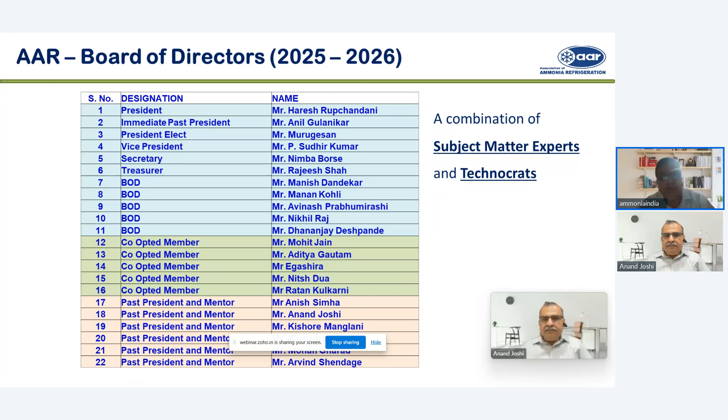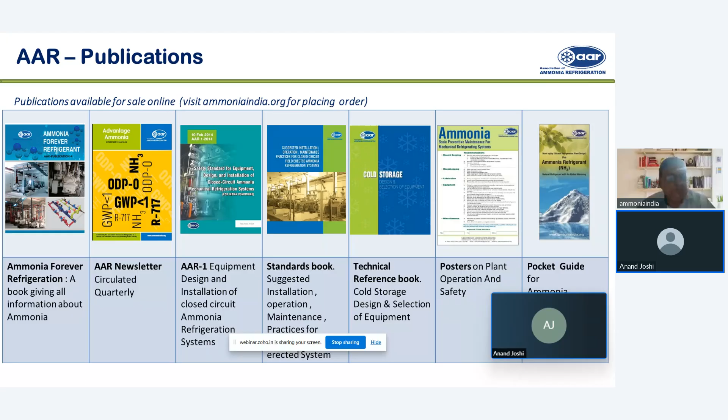This is a standard on which we had put a lot of work, and we came out with a safety standard for equipment design and installation of closed circuit ammonia mechanical refrigeration system. Based on this, BIS has adopted it, and an IS standard is now available.

Advantage Ammonia programs are in-person programs we have been doing, and they have been very popular over the last 10-12 years. This year we have so far successfully conducted 2 programs, one in Pune and the other at Sangli. We have planned to conduct more such programs at Coimbatore, Nashik, Mangalore, and Deesa in the coming days.

Then webinars, which are free, just to spread knowledge of ammonia refrigeration. We started in June this year, and it has been continuing. So after series 1, we will plan for series 2, and the webinars will be an ongoing thing.

Apart from webinars, we are also thinking of providing online training to interested companies or individuals. So if any one of you want some kind of training conducted online, you can approach AAR. We'll be glad to assist you on that.

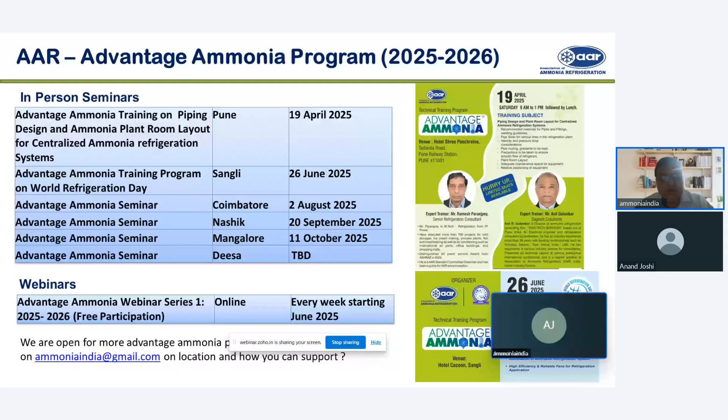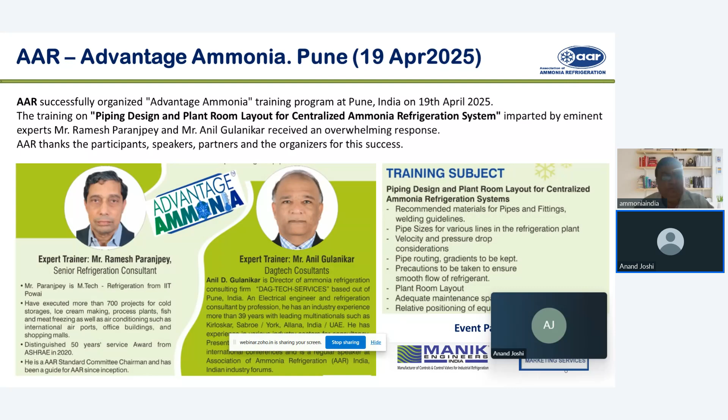At the Pune program we had expert speakers, Mr. Paranjpey and Mr. Anil Gulanikar, regarding piping design and plant room layout. These are some of the glimpses of the program.

On 26 June, which was World Refrigeration Day, we conducted a program at Sangli because we wanted to be at the ground level rather than having a big fancy program with no technical stuff. We wanted to be in the midst of the actual end users.

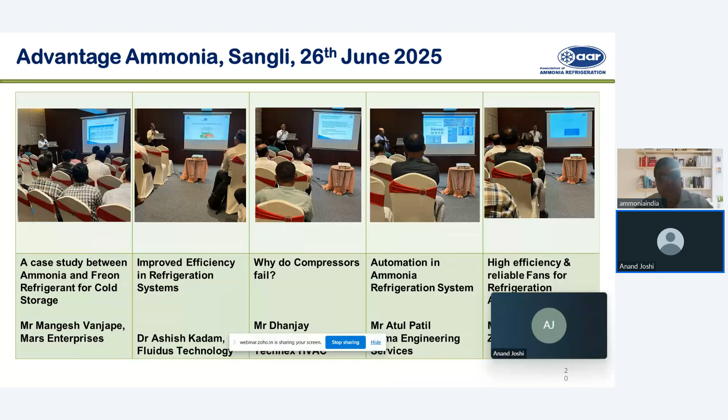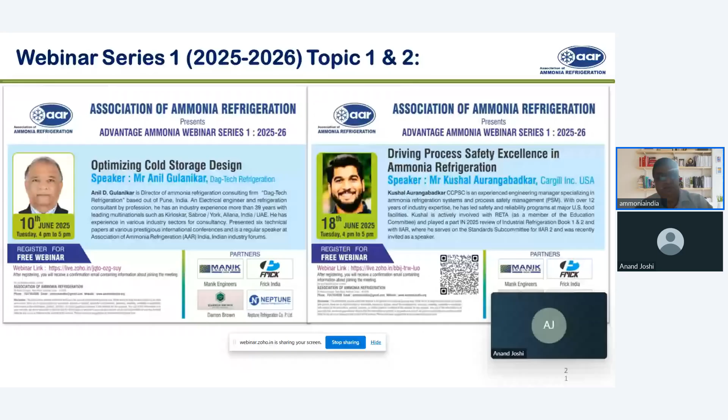Coming to webinars, we already had three topics: webinar one on optimizing cold storage design, second one on driving process safety excellence in ammonia refrigeration, and third one on new HFO refrigerants and their impact on environment.

Arcon, our flagship event, will be held in January at Hyderabad. We are in the process of finalizing the venue, and we will share that with you soon.

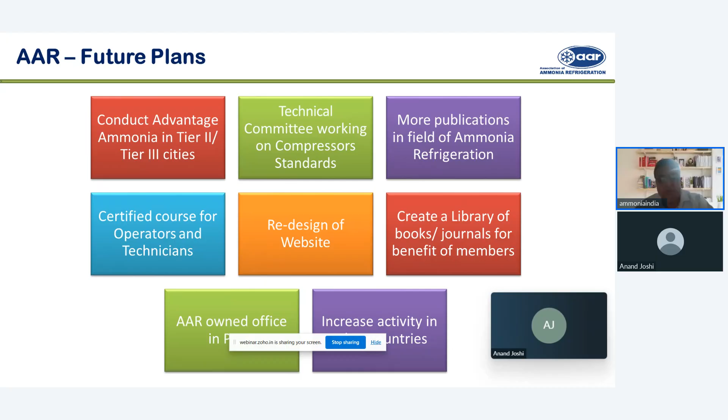For future plans, we want to conduct more Advantage Ammonia programs in various cities. The technical committee is working on other standards as well, and we are working on some publications. Something we want to seriously pursue is a certified course for operators and technicians, redesign of the website, and creating a library and having our own office.

Today's presentation is all about the harmful effects of water, oil, and dirt in ammonia refrigeration systems. I'm trying to explain my experiences with these issues and what are the harmful effects on the system. I'm thankful to the Association of Ammonia Refrigeration for giving me this opportunity, and I hope you will be able to get some benefit out of it.

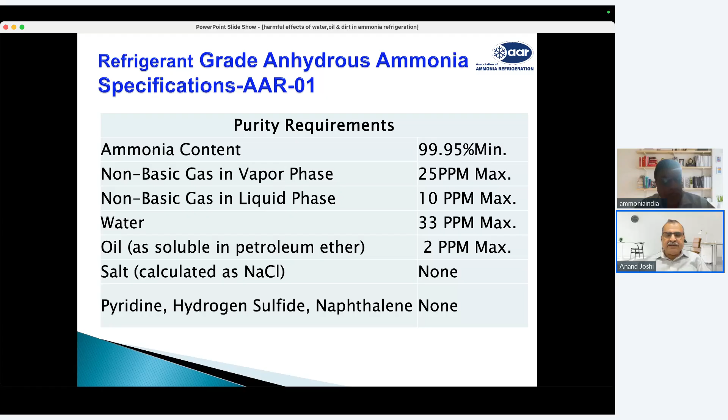As we know, the ammonia purity required is 99.95% for refrigeration plants, which is called anhydrous ammonia. However, we normally don't get that kind of pure ammonia, or our ammonia suppliers normally don't supply such pure ammonia, and there are ways in which impurities or contaminations enter into our system. Let us try to find more about it.

When we talk about our ammonia temperature-pressure chart, which we all refer to for plant operation, system design, operations and everything, this chart is valid only for pure ammonia, that is anhydrous ammonia. If our ammonia is not anhydrous and contains water or other things, this chart does not hold good.

To get these results, like minus 40 degrees centigrade at minus 0.28 bar gauge pressure, we must have pure ammonia. If water or other things are there, then you will not get minus 40 degrees at minus 0.28 bar pressure. So let's try to see what is the contamination.

Technically, a good ammonia refrigeration system should have refrigerant and oil, and the oil should only be in the compressor or the parts like the oil separator or oil cooler. It should not go into the system. Anything else in our system is a contamination.

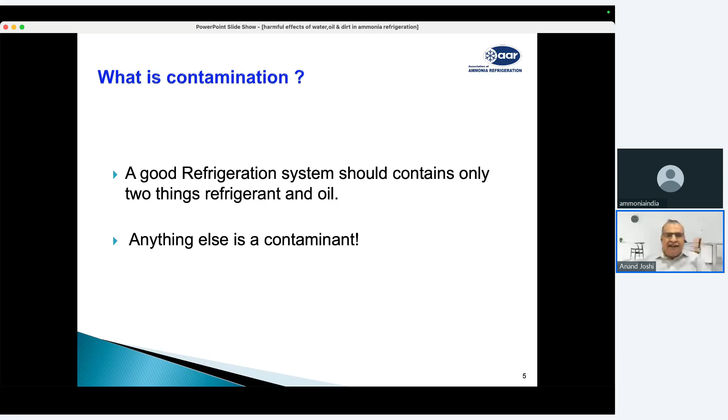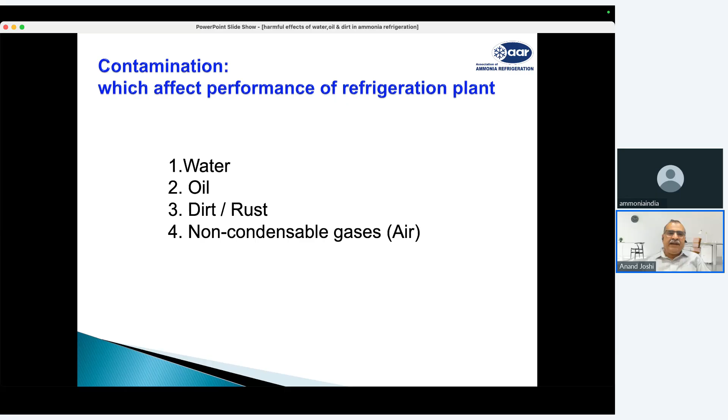What are the normal items we observe as contamination? One is water, oil, dirt, rust, sludges, and of course the non-condensable gases. Today we are not going to talk about non-condensable gases, but we'll talk about water, oil, and dirt. Even though these three are different parameters, they do affect each other, and their presence contaminates the other one. Water definitely contaminates the oil, and water definitely generates more rusting or sludging into the system.

See, typically, let's start with the water. Water has got very high affinity to ammonia. It means when water comes in contact with ammonia, immediately the water and ammonia come together and they form one soluble ammonia-water mixture. Because of this solubility, the ammonia changes its state, and from anhydrous ammonia it becomes hydrous ammonia.

As the temperature of the solution or ammonia is reduced, its ability to absorb water increases. Typically, at 30 degrees centigrade, it can absorb around 30% of water. At 0 degrees centigrade, it can absorb about 46% of water. And at minus 33, it can absorb around 100% of water. So typically, for a freezing plant or a low temperature plant, the possibility of water and ammonia mixing is 100%.

Now, when ammonia and water mix together, it actually forms ammonium hydroxide. These ammonium and hydroxide ions can cause corrosion in our system. And when this water mixes with compressor oil, it also has a chemical reaction that creates nitro compounds, which we also call sludges. These sludges definitely clog strainers, filters, and the compressors.

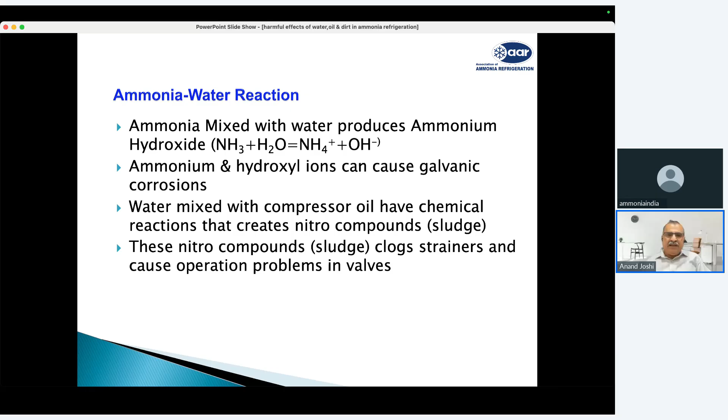Now, what is the effect of water mixing into the ammonia? When there is pure ammonia, you can get minus 40-degree temperature at minus 0.3 kg per centimeter square ammonia pressure, or at 0 kg you can get minus 33 degrees ammonia temperature.

But when you have 20% water in ammonia, remember below minus 30, 100% of the water can get absorbed into the ammonia. So at 20% dilution, instead of getting minus 40, you will get only minus 36 degrees centigrade. Or instead of getting minus 33, you will get only minus 29 degrees centigrade.

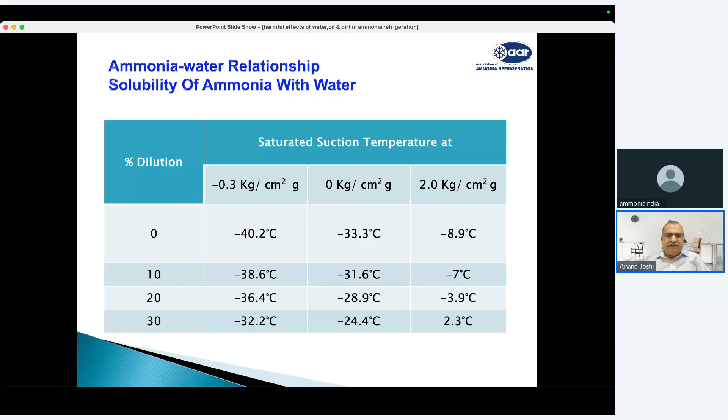So what it means is that I will not get my desired refrigeration capacity at my rated condition. To get that rated desired refrigeration capacity, I need more capacity of the compressor, or I need to operate the compressor at lower suction pressure to get the same refrigeration effect. So these things totally affect our system.

Now, how does this water come into our refrigeration system? Water can come in during the initial construction and testing setup, and water can come in from continuously running the plant. When the plant is being constructed or the equipment is being manufactured, water remains in the system in various ways, such that water can remain in vessels when people are doing the hydro testing.

Technically, as per IIAR standard, you should not be doing hydro testing. You should be doing testing with dry nitrogen. But still, many people use hydro testing for the pressure vessels and other equipment. So then, if it's not properly drained, you will find a lot of water remaining in the system because it's difficult to dry out these vessels.

And during construction at the site, ammonia, as we know, is basically a site-fabricated refrigeration plant. Many times our pressure vessel connections or the pipes are kept open, and the condensation which happens on this pipe during this installation when they are open, the condensation goes inside the pipe. If pipes are not properly cleaned, this condensation remains in the pipe, and then that goes with the ammonia.

Also, many times people use air for the pressure testing. Particularly, they use the ammonia compressor to get the air, and then that air is used as air pressure. So this air, when it enters into ammonia, being normal atmospheric air, it also contains moisture. And this moisture which enters with the air may remain in the pipes and the vessels, and then that cannot be properly evacuated.

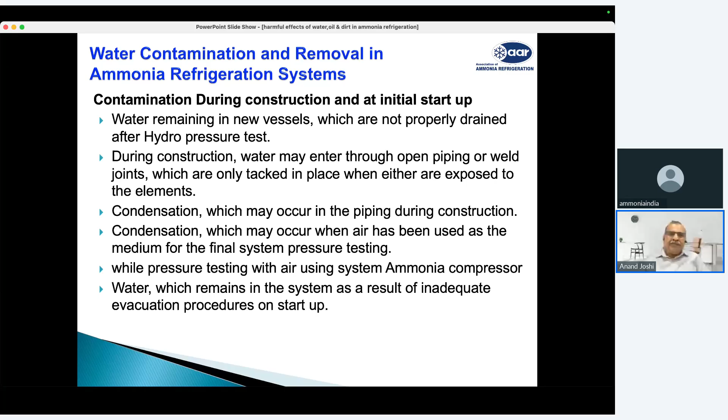When this plant is running now, we already have water content in our plant. When the plant is being charged with ammonia, many times we do not have the certification for the purity of the ammonia we receive. We receive ammonia with water itself. Instead of having 99.95% pure, it may be 95% pure ammonia, so 5% of the balance may be water, and that we don't know.

Also, many times we top up the ammonia with ammonia cylinders, and water is there in the cylinder. To get the full ammonia out of the cylinder, we try to rotate the cylinder by 180 degrees, and that puts all the water inside the ammonia.

Then there are heat exchangers like shell and tube heat exchangers, which are used as chillers, condensers, or oil coolers, where there is a possibility of leakage and water entering into the ammonia system from the coolant side. When you are draining the oil or charging the oil, it is also possible that air will enter into the system, and it may contain water.

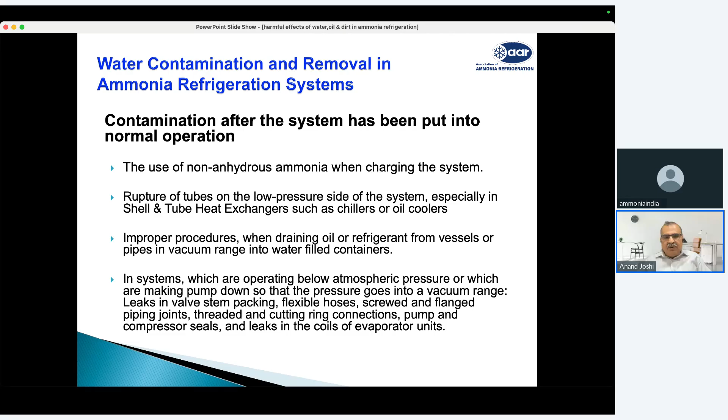When you are operating the plant below atmospheric pressure, that is below minus 33 degrees centigrade, the inside pressure is vacuum. So if there are any leaks in the valve stems, flexible hoses, or other joints, instead of ammonia coming out, air enters into the system, and along with the air, we have water inside.

Also, when proper evacuation is not done during servicing, or when filters are open for cleaning, if you don't do the proper evacuation, air enters into the system, and along with it, moisture enters into the system.

And sometimes between ammonia, oxygen, water, and sludge, this creates even more water into the system.

Another important effect is when we do not have purging systems or our purgers are not working. When the purger is not working, the air that enters the system will remain in the system, and the moisture that comes in with the air becomes water and mixes with the ammonia.

Even if the purger is working and purging air, as this example shows, there will definitely be water coming into the system. At the end of the year, we'll have 50 liters of water typically if the purger is just purging 5 liters of air per minute.

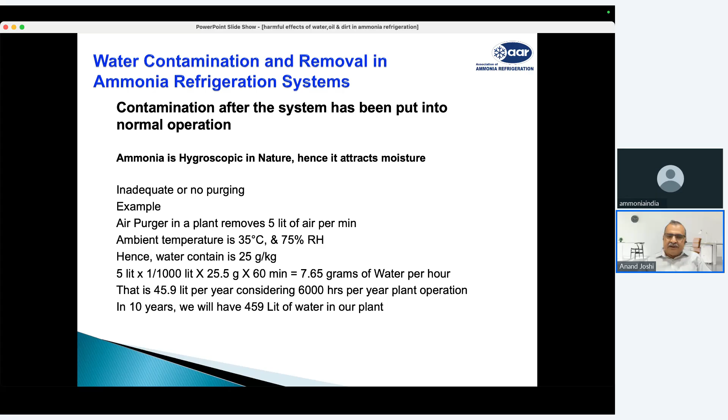So this water, when it comes into the system, mixes with ammonia, and along with ammonia, it causes a lot of effects. As I told you, the first effect is actually increasing the temperature of ammonia at rated pressure — you don't get the rated temperature at the rated pressure.

Then there is corrosion. Water and air coming together causes oxidation inside, and it causes corrosion into the pipes and vessels, and rust gets formed. This also affects the oil in the refrigeration system, and the oil starts forming organic acids, and then sludge gets formed.

And then, definitely, due to the water content in the compressors and the oil failures or deterioration in oil quality, compressor wear and tear and spare part damages increase.

We need to change oil frequently, so more oil is required, and more regular servicing is required.

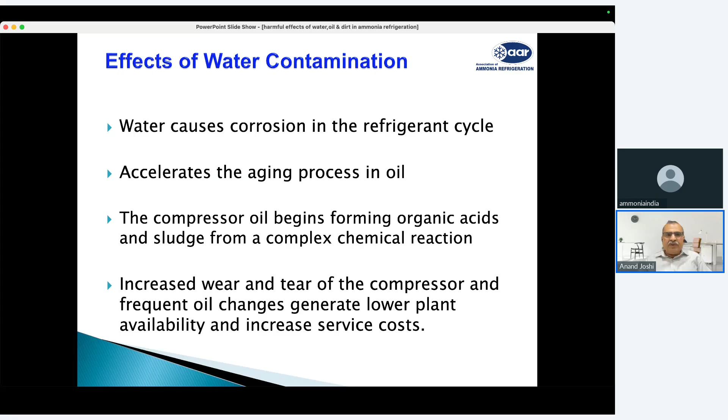Then, as sludge gets formed in the lines, or rust forms in the refrigeration lines, there are pressure drops, valve controls get affected, and pump and evaporator performance also gets affected when this sludge accumulates there.

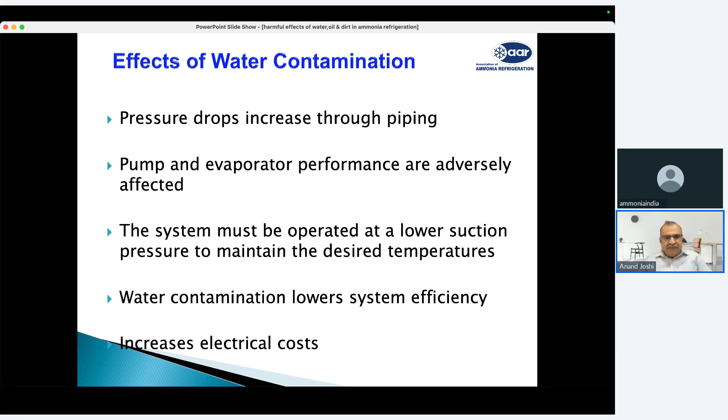Water contamination lowers the system efficiency, and as I told you, we need more refrigeration capacity — which means we need more electrical input, so we need more power requirement.

Now, water will normally accumulate on the low pressure side. There is always this misconception among people, but most of the time you will find water accumulating in the evaporator side, the pump receivers, the valves and controls, or in suction accumulators for DX systems. If we have a two-stage system, it will accumulate more on the low temperature side than the high temperature side.

Why it happens like that is very simple, because there is a pressure difference between ammonia and water. For 2 degrees centigrade, ammonia pressure is 3.6 kg per centimeter square, whereas the water pressure is only 0.007 kg per centimeter square.

So when ammonia evaporates, the ammonia goes out, but the water remains in the system, and it remains at the lower side of the vessel. So at the bottom, mostly you will always find this water.

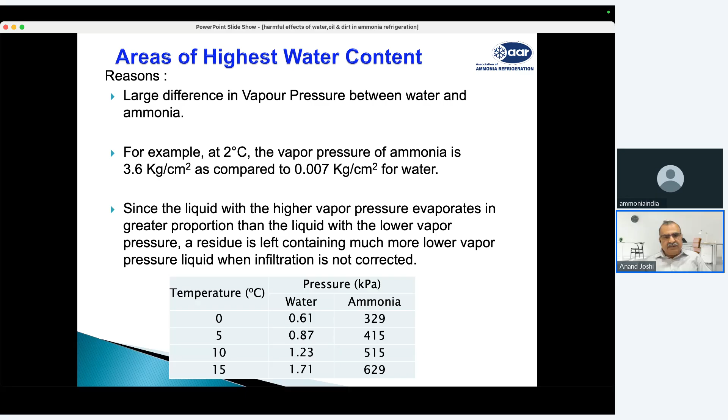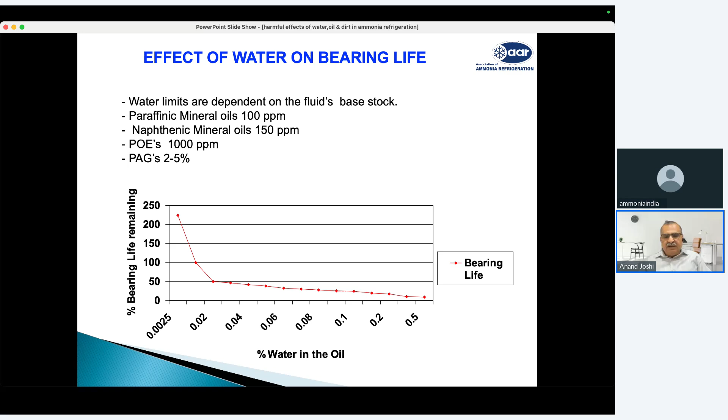This is typically when water is mixed with oil. You will find sludge getting formed on the filters, choking them, and the oil also gets damaged. So you need frequent replacement of the oil.

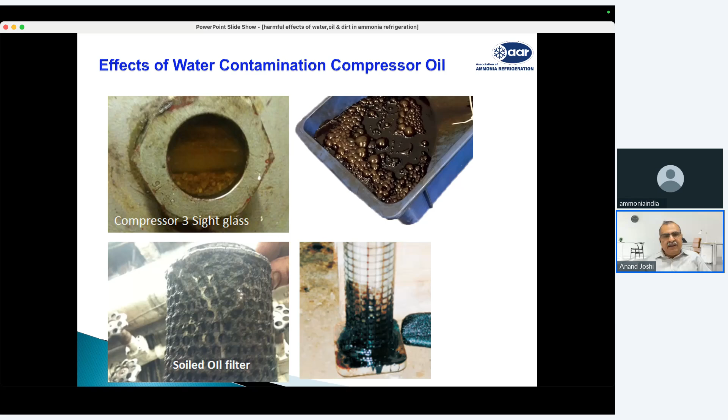This is a typical example in a piston compressor of how the big sludge is being formed, as you can see in these pictures. This is how the valves and controls get affected.

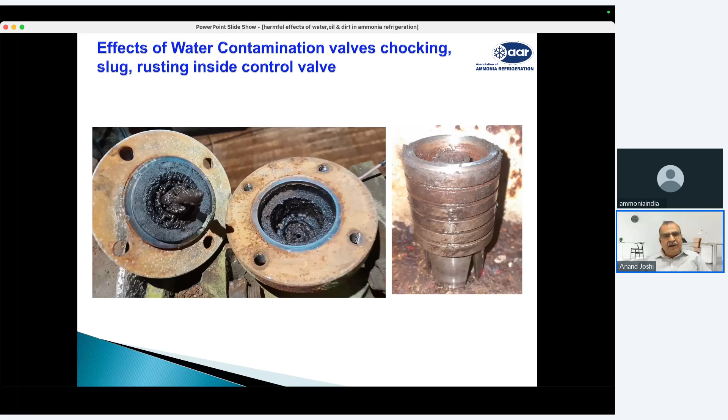Because of the water in ammonia, there is so much rusting happening inside the valves that the valves cannot operate, valves get choked, and you need to open all the valves and controls and replace them. These are some more photos showing how the sludge and water, along with the oil, damage the controls.

You can see here the water content found in the valves, and then it generates rust and dust into the system.

There are so many photographs which show how these various types of valves get damaged or get blocked because of this, how the filters get choked, and this sludge keeps forming inside. This damages your valves. Valve seats get damaged, and you get corrosion inside.

I would like to show how much water comes out of the refrigeration line. Just see, opening up the filter cap and the water is coming out of it.

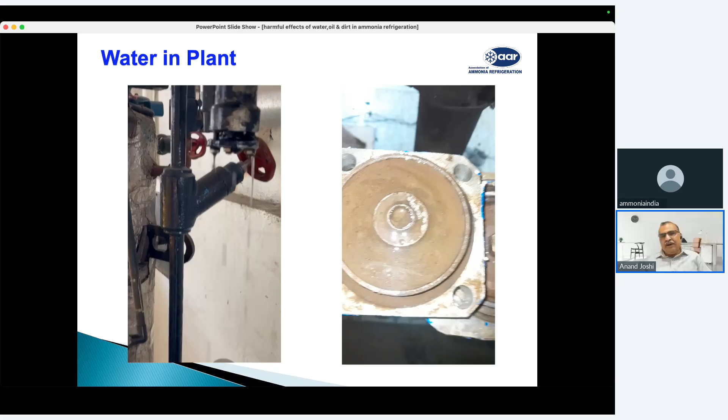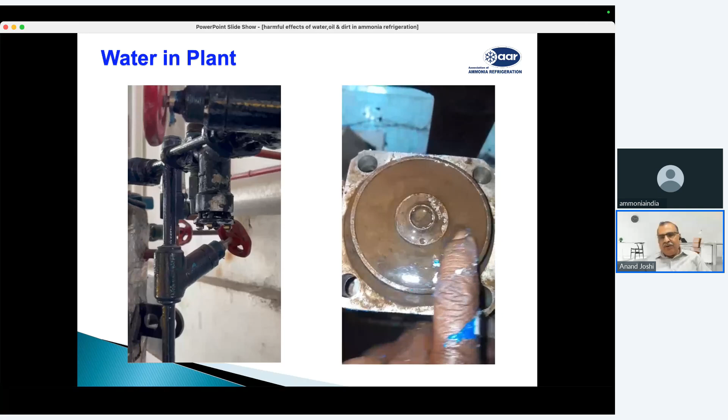In this video, you can very easily see the water accumulated in the valve itself. Because the valves are installed on the low temperature side, you will find water getting into them.

So typically, when we talk about the main effect of water, it is lowering the temperature. If you want to get a certain degree, instead you have to run the plant at a different setting. Because of 10% water condition, you have to run it at a lower temperature, which means you incur a huge amount of additional electricity cost. Very easily you can see we are talking of around 700,000 rupees, or close to $10,000, in a year's electricity. That's in India; in a different country electricity costs will vary, and that will also be your revenue loss.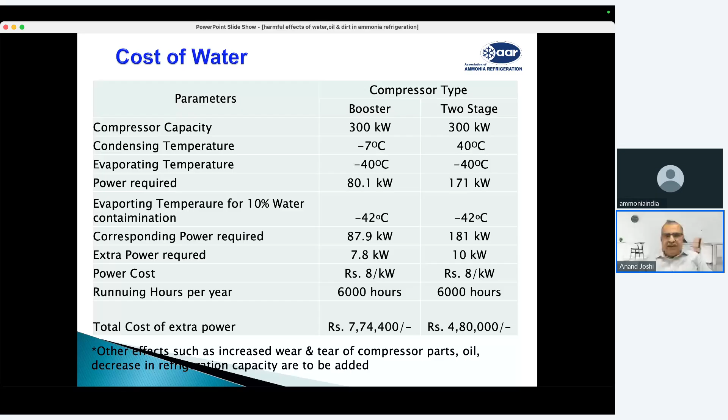Second part of this presentation is oil. Oil is a basic liquid used for the lubrication of the systems. Types of oils typically are vegetable oil, mineral oil, and synthetic oil. In our refrigeration systems, we use only mineral and synthetic oil.

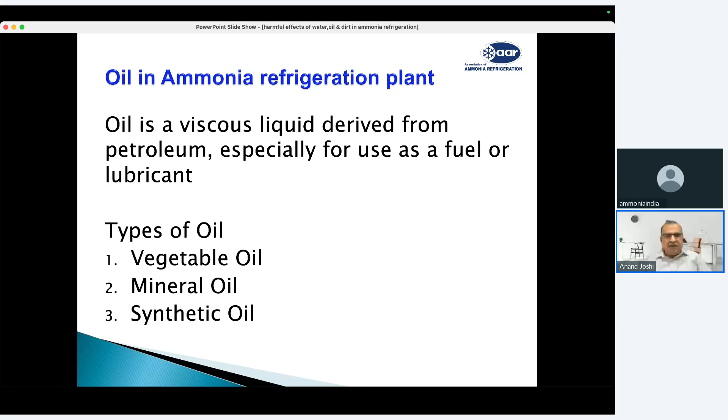Oil is used in a refrigeration plant, particularly in the compressor, for reducing friction, cooling the compressor, sealing the clearances with the piston or between the screws, reducing levels, dampening, and cleaning or washing out debris and gum matter particles, reducing corrosion.

Lack of lubrication, lack of oil in the ammonia system, is one of the major causes of compressor failure. What happens is, if there is liquid floodback and then a lack of lubrication, the compressor is guaranteed to be likely to fail.

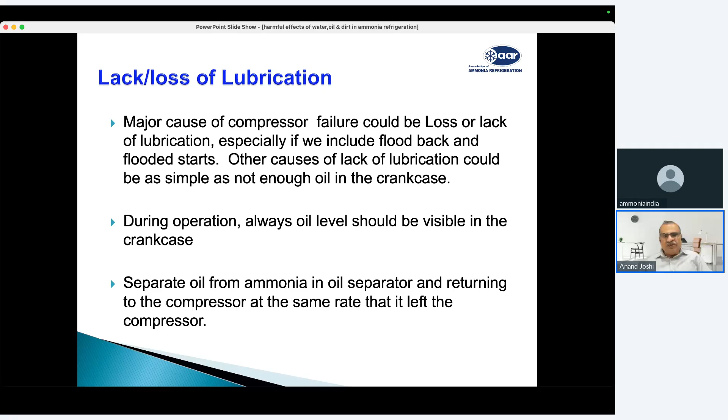With lack of lubrication, there is no sufficient oil. It means the oil is getting carried over into our system, our oil separators are not working properly, and it is getting thrown out, or there is more wear like you see in the pistons or piston rings in compressors. If the oil is not there, the components are going to get damaged, and it is definitely going to reduce the life of the compressor.

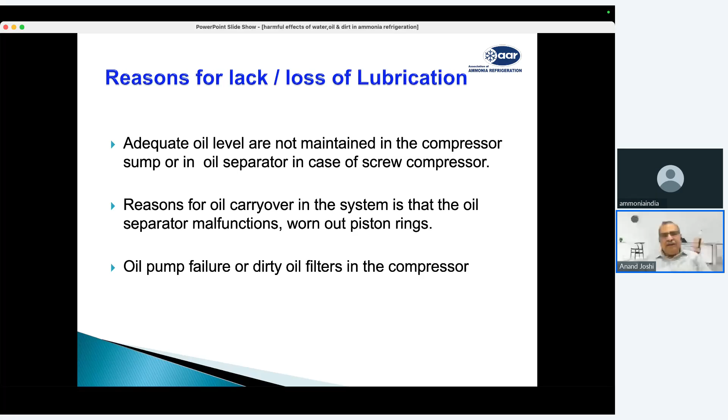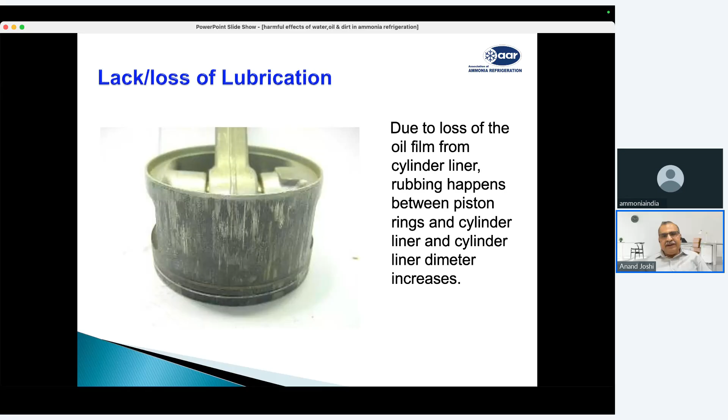And there is another effect of oil: sometimes our condensers are not working properly, or we have air in the condenser, and that increases the oil temperature.

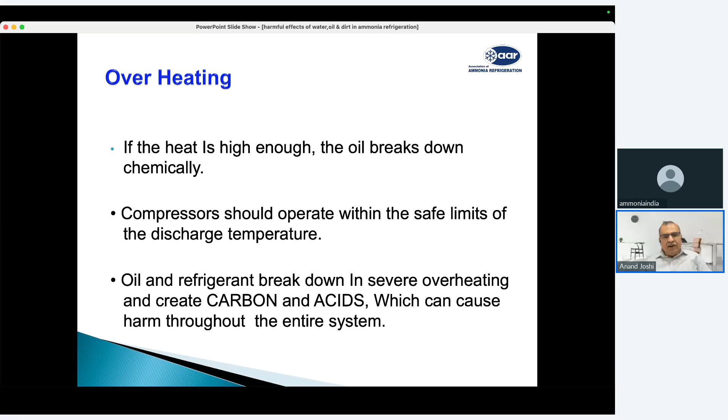So in high temperature cases, oil can break down chemically. And if oil breaks, it will generate components which are non-condensable gases, and those will affect the refrigeration capacity. The compressor will not operate in safe limits as the temperature goes high, and there will be a lot of carbon and acid creation through oil breakage, which damages the compressor. This is how a screw compressor gets damaged because of overheating.

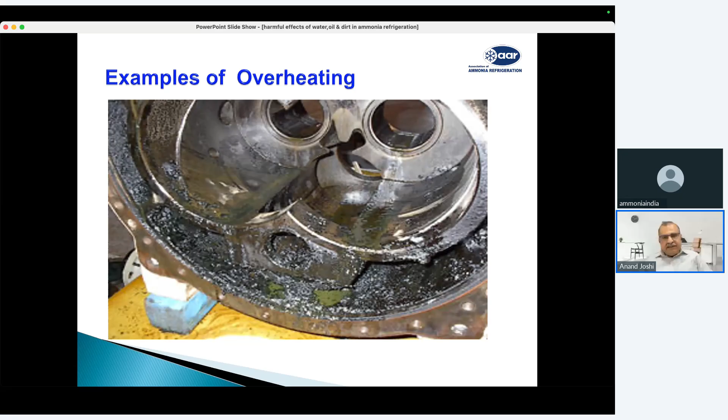So when the compressor discharge temperature increases, the oil coolers don't work properly. Oil temperature increases, and oil heating causes damage to the compressor. Replace the oil, recharge the oil. Sometimes you have to drain the complete oil and put in new oil.

Now, if there is oil carryover happening, the oil will go into the heat exchangers like condensers or evaporators, and the capacity of that equipment will be lost because oil gets accumulated there. Always remember, oil is heavier than ammonia, so it will always settle at the lower side of the vessels or heat exchangers, and that will also affect your instrument level controllers or level indication systems, which may generate malfunctions or give incorrect signals.

This also leads to continuous oil monitoring and oil top up. When we say oil top up, theoretically whatever oil we put in the system must come out from somewhere. But if we are not able to get all the oil back and we just keep topping up the oil, it means we are increasing the oil cost, and at the same time oil is getting accumulated somewhere on the evaporator sides, on the low pressure sides, and that affects performance. When oil carryover becomes more, we also have to drain the oil frequently.

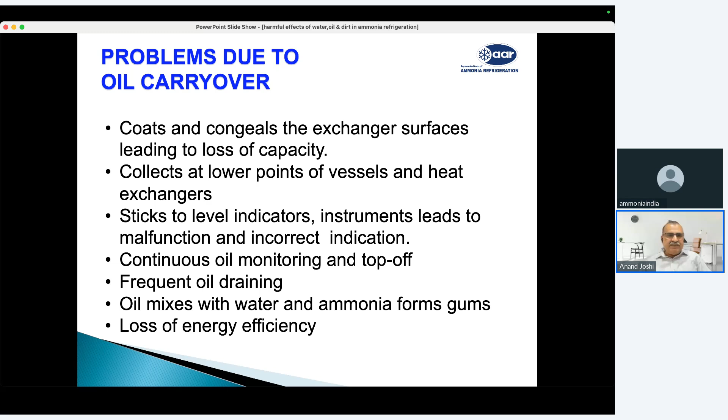In my experience, sometimes in particular gravity-fed systems, your evaporators get full of oil and you are not able to get the refrigeration capacity. Secondly, when this oil travels with ammonia - as we know, oil is not miscible with ammonia - it may mix with water in the ammonia, and then it forms gums, which definitely get choked into the system's filters, and it damages the system.

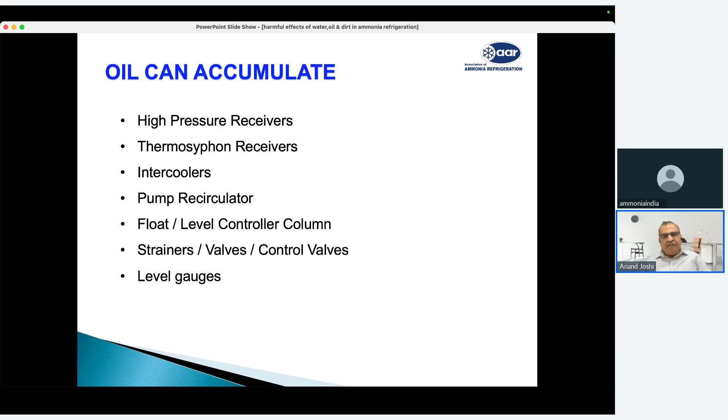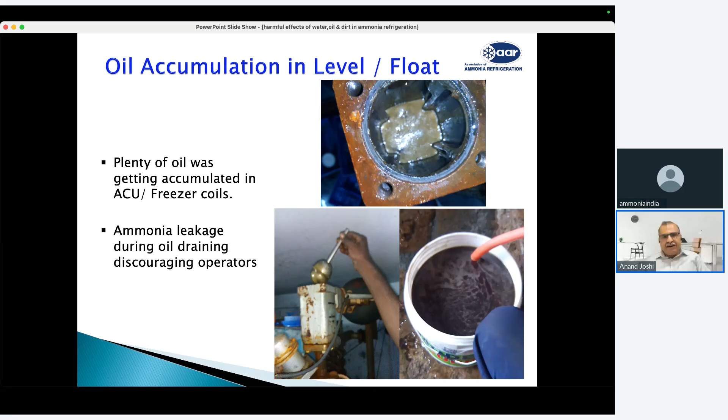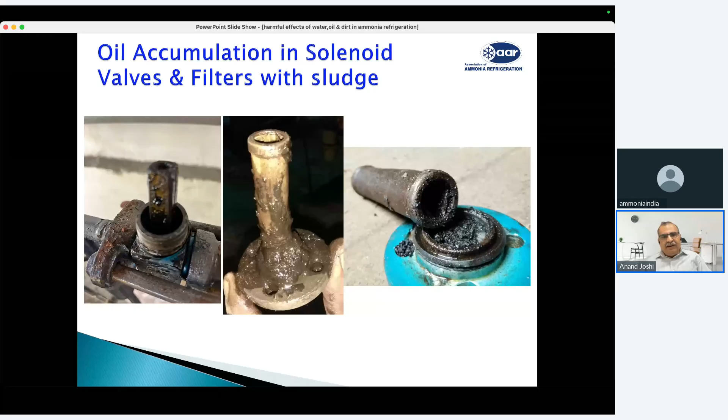This oil, along with dirt and other things, gets accumulated into your control filters and damages them. Its performance gets affected, and when it gets choked into the solenoid valves, it definitely leads to the burning of the solenoid coils. Another major effect of this lubrication failure is the bearing life of the compressor.

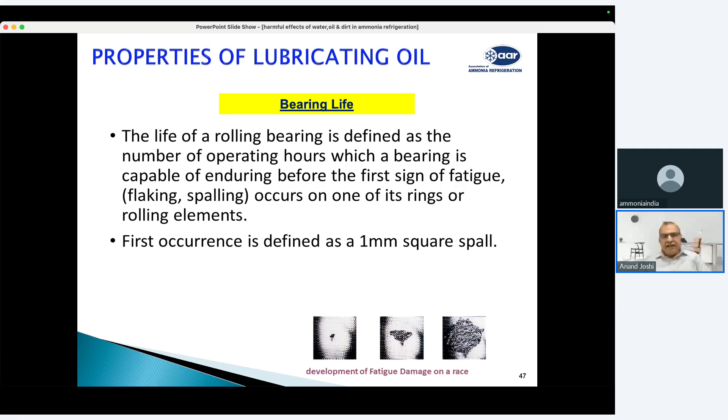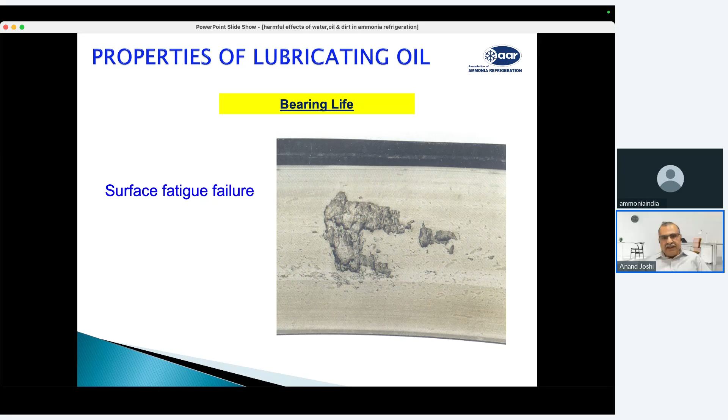As I told you, when water is present, the bearing life reduces because of it. Similarly, failure or poor quality of the lubricating oil causes bearings to get damaged frequently, and we need to replace the bearings sooner than their required operating hours. These are some photos showing failures in the bearings, like surface fatigue on the bearing side, or progressive surface fatigue. You can see here how it has been damaged.

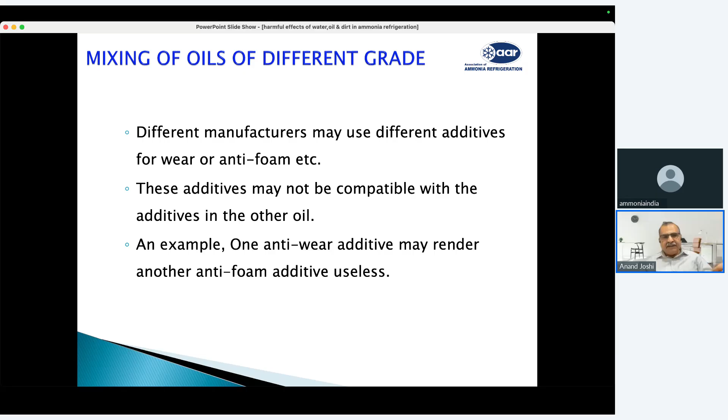There is also the possibility that many people mix different oils of different grades, or sometimes people sell magical additives which they claim will improve the life of the oil or the performance of the system - which does not happen like that. If these additives are not compatible with the oils you are using, they wear or damage your compressors. You can easily see bearing damage because of such oil additives.

Oil should not be mixed. Different types of oil should not be mixed. It creates a major problem and results in issues with the ammonia. Many times people sell those magical additives which claim to improve the efficiency of the oil and system, but it does not happen that way.

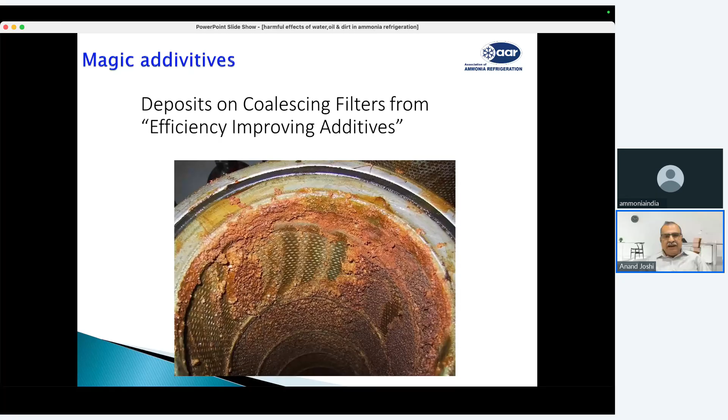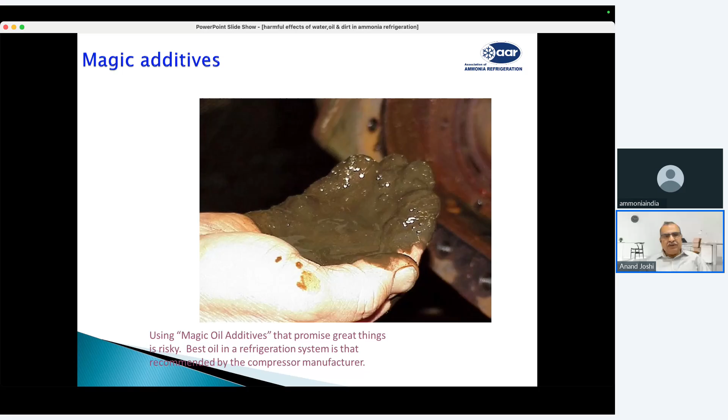You can see how the coalescing filters are getting choked, and you need to replace it. This is another additive being added, and you can see how it becomes a thick film and gets choked. These products affect the mixers, and you can see here in the video how that oil gets sludged into it, and now it is being drained from the refrigeration plant.

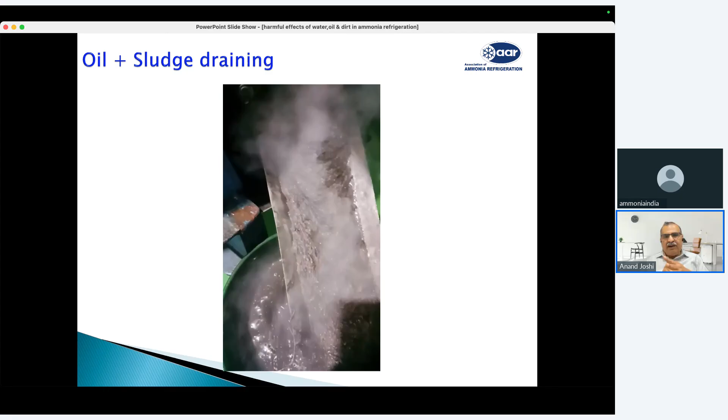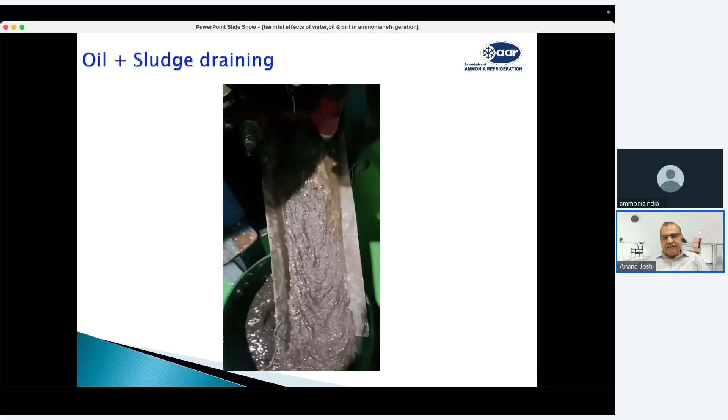This video clearly shows what happens when you mix different oils, oil additives, and water into the ammonia. We should avoid these things, and this is a very simple indication of what is coming out here from an ammonia refrigeration plant.

What happens is that oil is not miscible in ammonia. It should be transported back to the compressor through the oil separator, or should be drained immediately. If this is not done, you always have a problem.

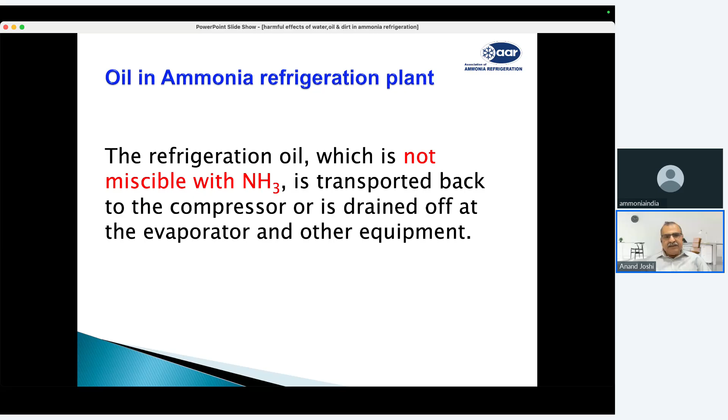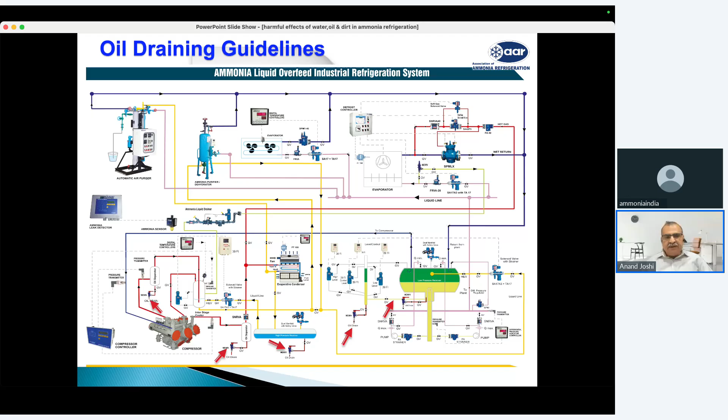When you are draining the oil, you should take proper precautions, because there is a possibility that ammonia may come out along with the oil. So the drain points must be provided at the bottom, and they should have differential pressures.

When you are using this, you should always use the spring-loaded dead man's valve, so that in case of any ammonia leak, it can be very easily closed. The pressure in the system should be higher than atmospheric pressure, so that you can take the oil out.

When the oil stops coming out of it, you should immediately let the valve get closed, and also close the valve behind your dead man's valve.

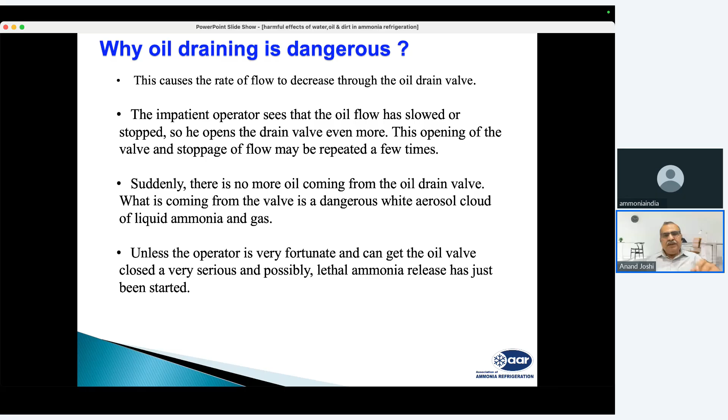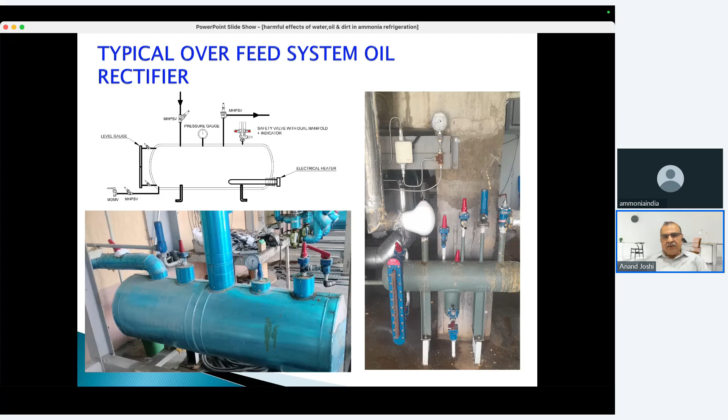This photo shows some of the points showing the oil drain here. You can see those oil drain points here, and such dead man's valves should be provided for draining oil. You can see each dead man valve is provided with a stop valve.

Normally the stop valve is closed, and when you want to drain, you open the stop valve, then operate the dead man valve. When you close the dead man valve, then close the stop valve, and open the dead man valve once again, so that anything accumulated between the valve and the dead man valve can be drained out.

Now the next part of the presentation is about rust, dust, and sludge which are being formed in the refrigeration system. Theoretically, all refrigeration systems should not have any foreign matters like dust, grit, rust, or impure oil, wax, sludge, etc.

However, these things always come into the system. They immediately damage your solenoid valves, control valves, and choke your filters. When there is air and water in the system, rust formation starts inside pressure vessels and pipes, because most of our equipment is made with steel. So when there is water and air inside, it is definitely going to start rusting.

During the installation process or maintenance process, welding burr also enters into the system. This welding burr gets into the system and then it mostly chokes the filters of the solenoid valves.

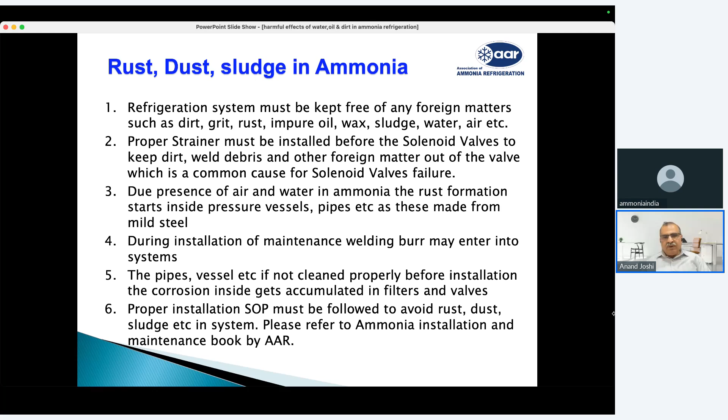Systems and SOPs have to be there in your plant to avoid any rust or dust formation in the system. Please refer to the ammonia installation and maintenance guidebook by the Association of Ammonia Refrigeration.

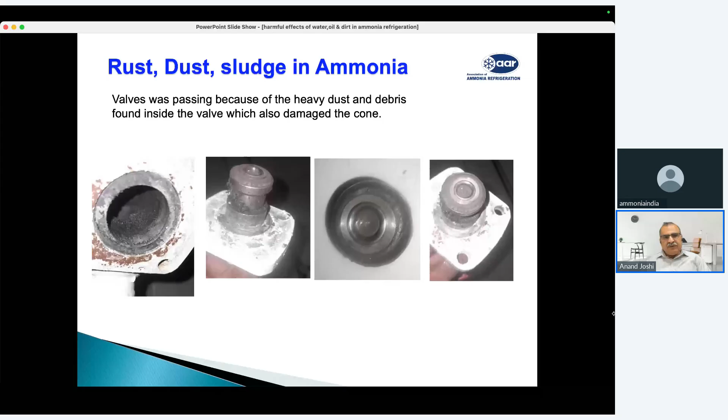When dust and rust come into the ammonia, it starts choking your valves. Valves get corroded, and you can see the valve seats getting damaged, covered with rust, and the valve does not pass or does not hold. That's a typical complaint we find, and it's because of this rust and dust.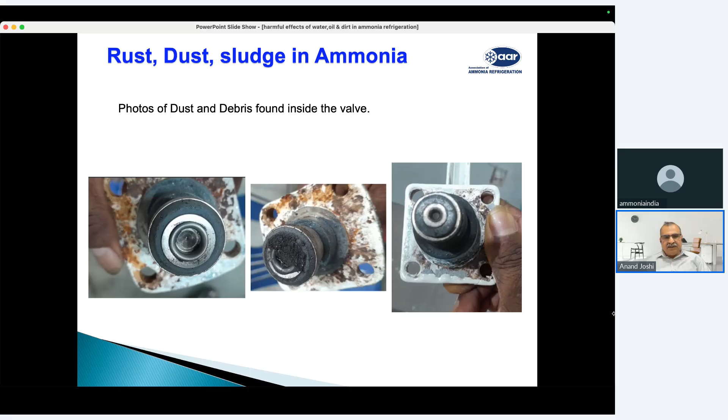These are some photographs from an actual site. You can see how much rust and dust is there. This means that when this plant was erected, it was not properly cleaned, and there is water in the ammonia system that is not being removed continuously. This damages your valves, your control valves, and this rust and dust always affects your total system performance and the performance of the controls.

Controls get choked, controls get blocked, and they do not operate. You can see here how much rust is in a small filter. Here is a particular example: you can see the pilot valve port getting choked because of the rust or wax inside the system. This valve will not operate because the port itself is choked.

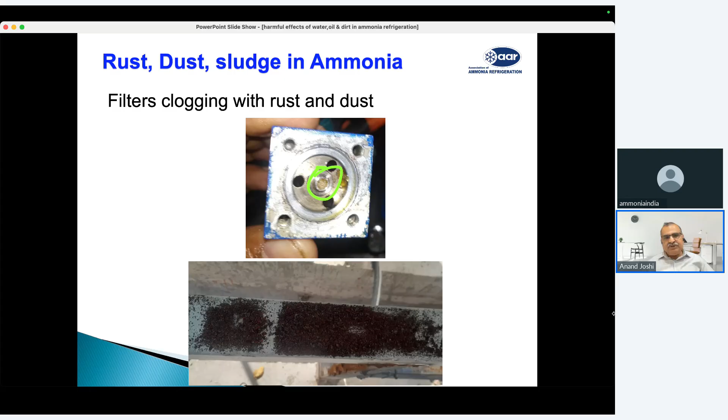There are always foreign particles coming inside the filter, and filters get choked. Rusting happens because of the water, causing rusting inside the valve controls. Remember, all our valve controls are normally steel valves, so when ammonia comes into contact with water, rust formation is always possible. The option is to go for stainless steel valves.

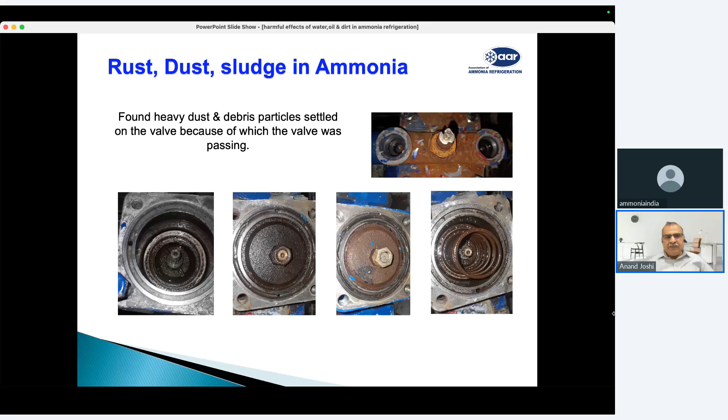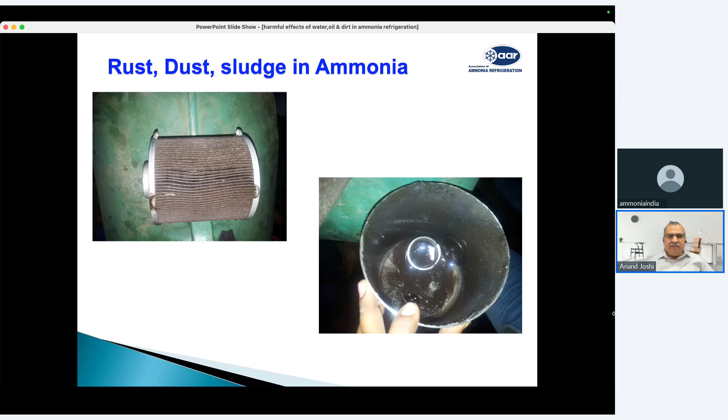The same thing happens with your screw compressor. The rust accumulates on your screws and damages your compressor body and rotors. Compressor filters also get choked—you can see this filter is completely choked. You then have to replace the filter, and when it's choked, there will be a drop in suction pressure. So your compressor will operate at much lower capacity or will not get proper suction, affecting the performance of the system.

Here's another example: this level gauge is completely filled with rust. The sludge is in the level gauge, so you cannot see the ammonia liquid. This means the pressure vessel where this level gauge was installed is full of rust and sludge. You cannot see any ammonia liquid—it's all black. This is what happens when you have sludge in the system.

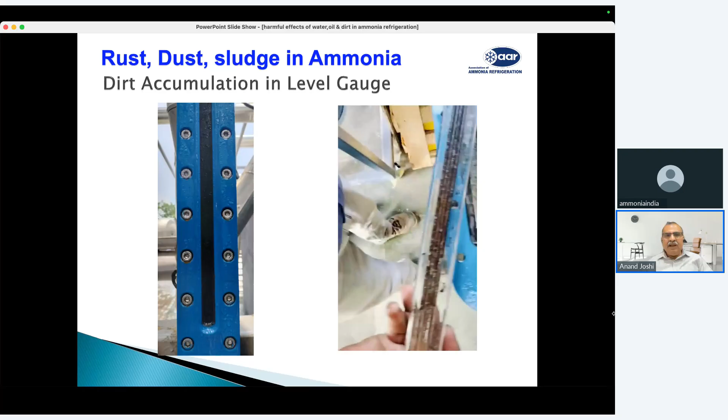The main thing that happens with this water and sludge is that it damages your safety valves—the seats get damaged. So either the safety valve leaks or it does not open when there is pressure higher than its rating. Unless you calibrate your safety valves, since it's not a daily operating device, you don't know what's happening inside. When it's required to operate, your safety valve will not work. You need to calibrate, repair, and recalibrate your safety valves every year.

In refrigeration systems, only refrigerant should be circulating in the system and nothing else. All other materials are what we call impurities or third-party elements which are not required for refrigeration. Secondly, ammonia has a very high affinity for water, so when it comes into contact, it absorbs the water. As the ammonia temperature is low, it has more absorption capacity for water.

Third, oil is not miscible in ammonia refrigeration, so it gets carried over along with the ammonia and accumulates in every part of the refrigeration system. Being heavier than ammonia, oil settles at the bottom of evaporators, receivers, or intermediate LP vessels, where it accumulates and starts affecting refrigeration performance.

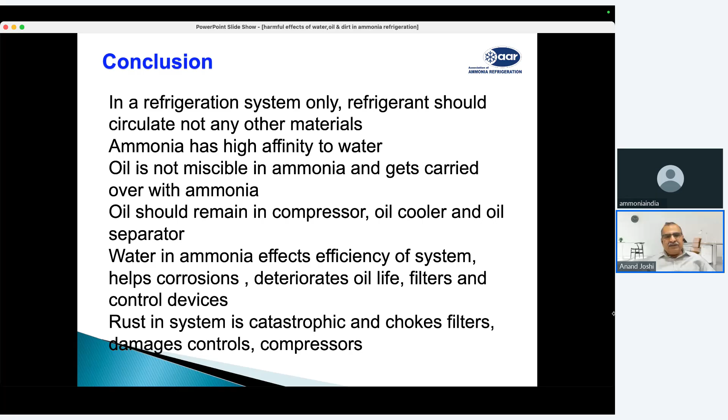That's all. And then I want to thank specially Dr. Ashish Kadam and Mr. Dhananjay Deshpande, who helped me a lot, sharing a lot of information and their slides in making this presentation. And again, I thank the Association of Ammonia Refrigeration for giving me the opportunity to make this presentation. Thank you, everyone. Thank you very much, Harish.